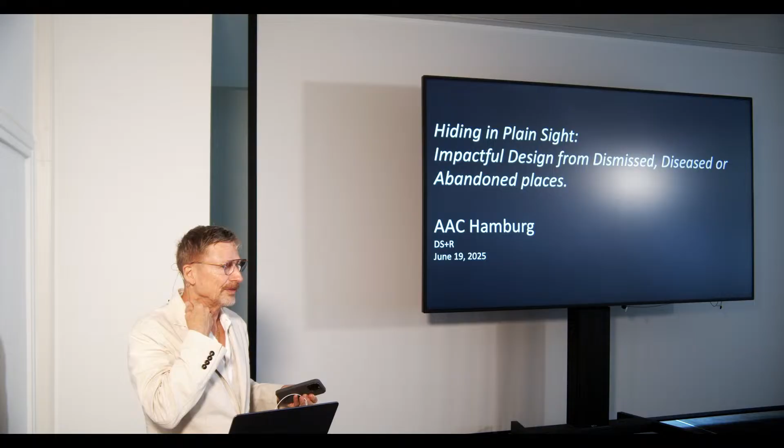Hi there. Can everybody hear? It seems so. I always like to start my talks by saying I'm from Texas, I don't need a microphone. But I'll try to speak quietly tonight.

So I'm really thrilled to be here in your beautiful offices with this stunning view of an industrial landscape, which in a way is reminiscent of Houston, a place that is made up of half industry and half something else. It's not quite city, some people have termed it Drosscape, whatever.

But to me, it's all about possibility. And that's why I think the Houston problem, I'm talking to the people in the program here, I think the Houston problem is really quite wonderful because it's about possibility.

Houston is never made, it's never done, it's always in the process of being done. And that's why I think if we take the problem seriously, and I'll talk about this more tomorrow in our crit, I think we can make something really relevant in this absolutely unique site, grown out of its possibilities.

So we'll talk about that more tomorrow. But mostly I'm really happy to be here. It's true, I came knocking on GMP's door. I said, can we work together on something?

Anyway, and then it turned out that it's AAC, which I teach and I practice. I do all of it, little bits of it all. I'm going to try to talk for an hour.

Today's talk is really intended to showcase a portion, a section of our work that is maybe not the most famous, but some of our famous pieces. But mostly it's to showcase a practice that we do, which is kind of cultural archaeology.

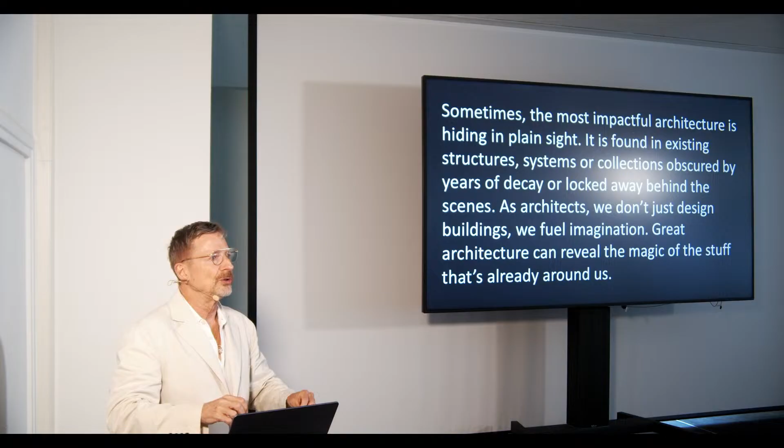Sometimes the most impactful architecture is hiding in plain sight. So one of our practices in DS+R is to drill down on a site. And a site is not just the physical location, it's the historical, cultural, technical kind of milieu that surrounds a project. It's not just a place. And always by drilling down, you can always unearth the most exciting things. That's what this talk is about.

And so some of these projects are adaptive reuse, some of which is very relevant to what we're doing here at AAC. Some of it is just sheer fun, and you'll know that in just one minute.

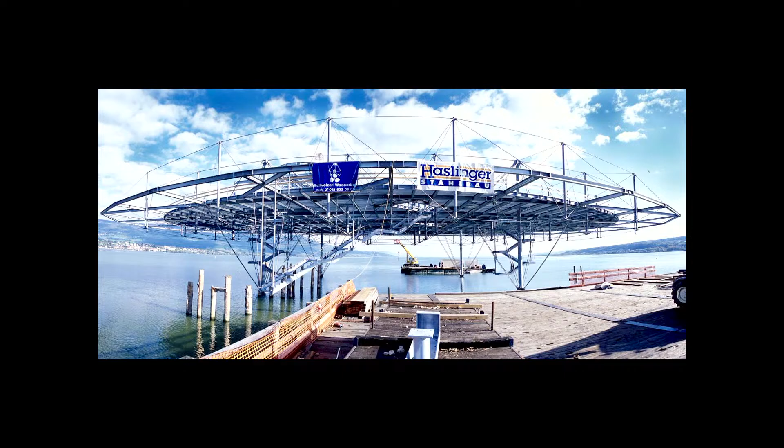This is a project made entirely of its site. Yes, it's got fog nozzles, but what makes this piece of architecture - changeable, movable, tasteless, weightless, constantly evolving - is made of the lake itself, Lake Neuchâtel, presented back as an immersive environment. We did this through a clever reimagining of 33,000 lettuce misters, something you could buy in a Grainger catalog, hanging on an innovative tensegrity structure. It's really an off-the-shelf product used in a ridiculous proportion, and it made a cloud the size of a football field that one could walk through and inhabit.

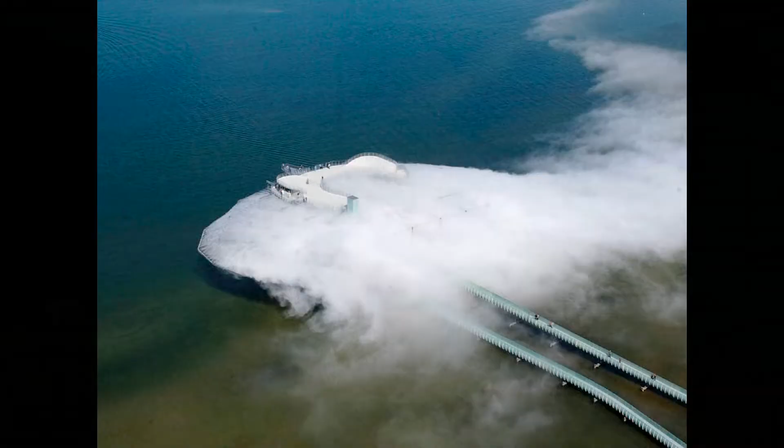This was a temporary pavilion for the Swiss Expo 2002. When we were tasked with the job, they said make a media pavilion, because we hadn't built a lot - this was in the early 2000s. Liz, Ric and I had made our practice about interrogating culture through the use of media. They thought we'd make some giant 100-meter high video screen, but rather than do something digital trying to recreate verisimilitude, we did something completely mechanical - something that would defy what people thought about our practice, but that illustrated a principle that guides us to this day: you need to look at the site you have and find incredible things about it.

It turns out that to pump lake water into misters, you have to clean it really thoroughly. There's phytoplankton that live in the water, and if you don't clean it with a sand filter, you can actually get sick and die. We didn't want one of our first pieces of architecture to cause any deaths.

What we liked about this project - and it's something we try to do in all our projects - is to understand the cultural framing of an experience. Here, we wanted to do something fun to look at, but that would also rob you of your sense of vision. Visuality and sight are things we interrogate in our work a lot. By taking away the understood idea of vision - something that might have been held in the pixels but that we stripped entirely - you fall back on your other senses, and you realize how dependent we are on vision, as the master says.

Jump forward ten years, and with the High Line we had the opportunity to remake an abandoned rail line that was 3 kilometers long. It had only been used for about 40 years to transport food, essentially, to all the neighborhoods of lower Manhattan. It was abandoned after the interstate highway system came on, and the city of New York didn't know what to do with it, so they just let it lie fallow and become a kind of industrial ruin.

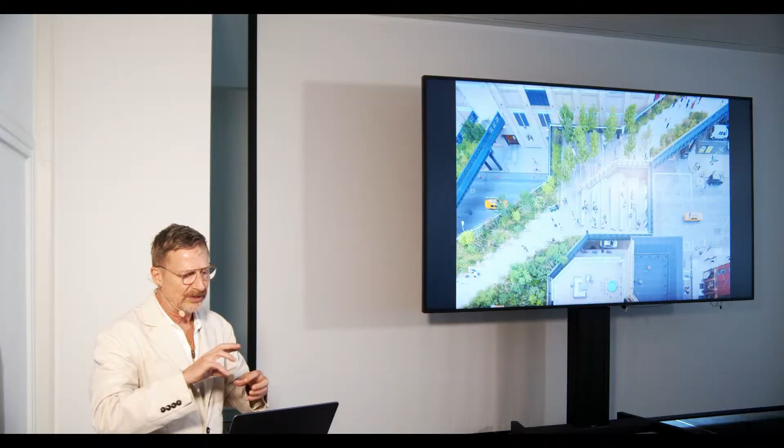It's an observation platform where people are observing each other, interacting with each other, a place where people get to see and experience New York in ways they've never experienced. The existing line touched buildings, went adjacent to their loading docks, passed through buildings. It's kind of a pornographic situation, an urban pornography.

We wanted to just keep that going, so we took advantage of moments where the structure was overwrought, oversized—like here at 10th Avenue at the crossing, the beams were so deep we could get an entire floor down to the very bottom of the beam. So we made this observation deck that lets people sit there and look at the tail lights of people going up 10th Avenue.

Such a quotidian display—I don't think anybody's ever really highlighted that before. But what it does is it makes you think about the world around you, the city around you, the New York City that you don't ever see. You're in it, but you never really see it. And we encourage people to take advantage of each situation.

Lots of weddings, lots of impromptu musical elements have happened there. This is when the High Line opened. The first Standard Hotel opened, and it crossed the High Line, straddling over the line with its legs. You can only imagine Andre Balazs, a bit of a bad boy hotelier, encouraged—so it's been said—his employees and guests to put on a bit of a show for people on the High Line. Of course, we love that. We love it when something inspires people to act, and we got so excited about this. Again, this is about mining what's there.

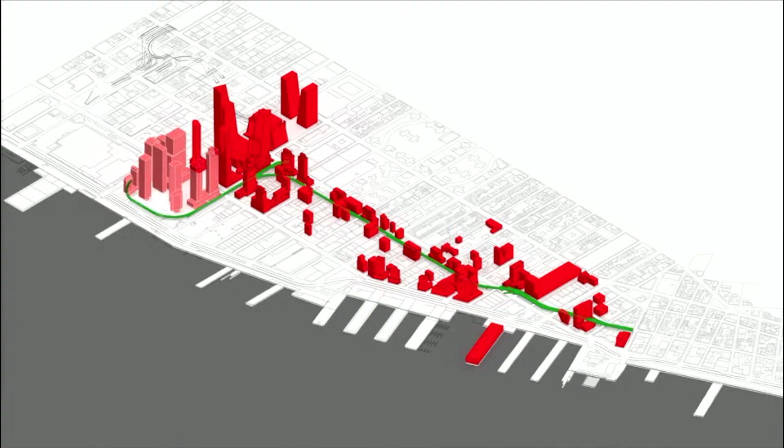These are all the projects that have been made since the High Line was made, and most of them were made directly on the line, because we rewrote the zoning when we made the line. We rewrote the zoning to allow medium-high buildings to be made right on the line. They could touch the line if they put an elevator and a bathroom in, and the owners could transfer air rights from their medium-high buildings to the edges of the blocks to make high-rise buildings. So there was a kind of handshake deal to keep development dense but low along the line, to mimic what was there to begin with, and then to boost development in the rest of Chelsea.

It's been interesting, and the cover of New York Magazine says it all: how a park built on a junk heap became a glamorous symbol of everything you love and hate about the new New York. I think that's pretty interesting. This does go to gentrification, which is one of the things we have to look out for when we do projects that are remaking our cities as we know them. Somebody's going to get left behind, somebody's going to win—you can't solve all the problems all at once.

But this seems unrelated, though it's related. With the Broad Museum, what we tapped into—the hidden thing we tapped into—was the youth of Los Angeles. We did that in two ways. One, we made the museum ticket-free in conjunction with the Broad Foundation. And we also made it barrier-free, not in a physical way, but just the way that you enter.

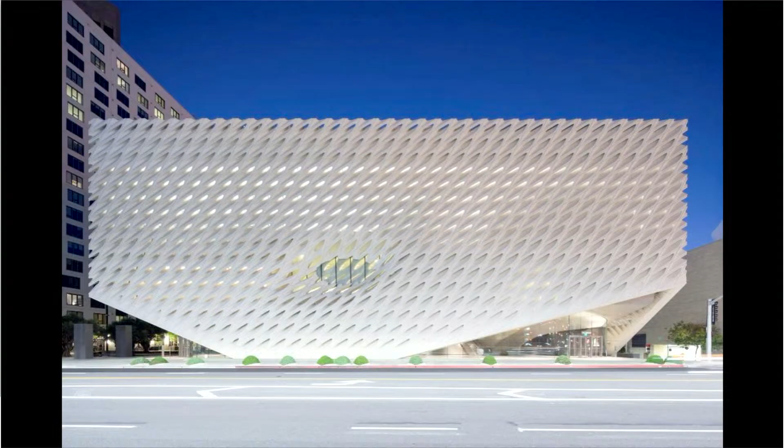Here's the veil. You can see how all of the pores of the veil, also sort of like a sponge, are angled in the exact same direction against direct Southern California sun, so it lets in only indirect sun and shields the interior from the direct sun. This is before we had quite finished moving in, but this is the idea.

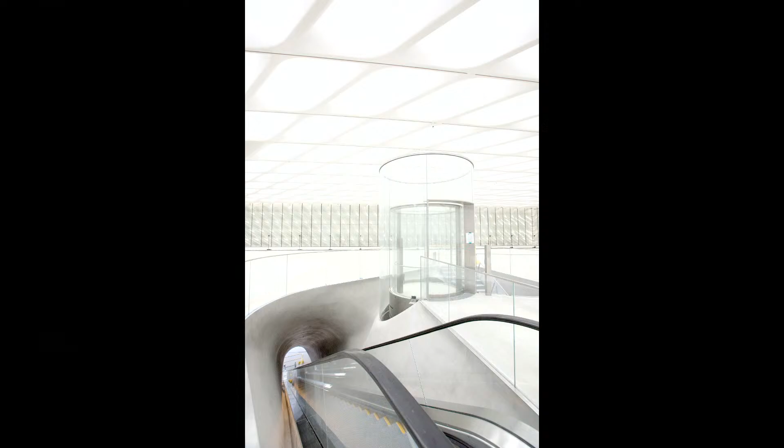No desks, no people - there's a front door, one person to check that you've checked in, and up you go, up an escalator, swallowed up. A one-way escalator takes you up to art heaven, I like to call it - a sun-drenched, indirectly sun-drenched acre of floor space used for the contemporary art of Eli Broad's collection. Here it is without any walls.

The whole thing beautifully bathed in light. This is the first show, which I think is 10 years old now, and you can see how you can just put the walls in. His collection is considered one of the world's best contemporary collections.

Then what happens is when you finish the tour of the museum floor, the gallery floor, you're treated to a different route out. That route lets you explore the archive - it lets you go behind the scenes to see what normally you're never given access to. Here, looking at the racks of painting storage, that's the stair going down. You can also see in the elevator going down the back of house.

Probably 5 to 20% of a museum's collection is ever on display at once. That means 95 to 80% is in storage. We'll talk about that in a second.

So what happened here? I'm just going to read a couple of these points. 62% identify themselves as other than Caucasian, and a big percentage say this is the first time they visited an art museum, which is pretty amazing - compared to the national average of 23% non-Caucasian. Also, 33 years old on average, more than 12 years younger than a national art museum average.

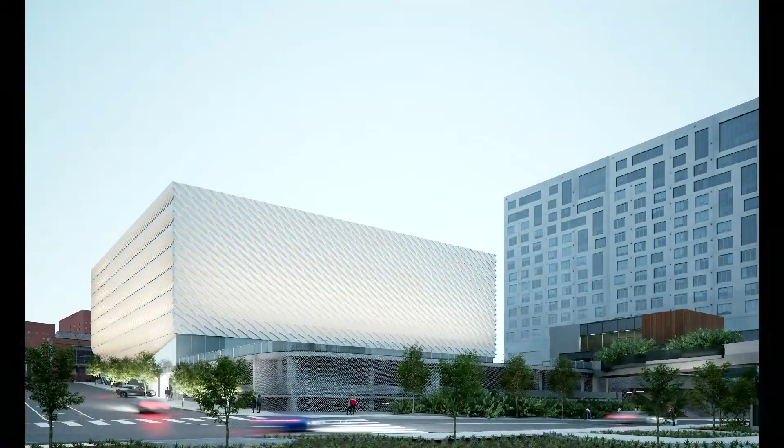There's also a park next door with 125-year-old trees. It's been so successful that, guess what, we're adding on to it. We are happy that we got this commission because, believe me, the board thought maybe it should go to another architect, maybe GMP, I don't know, but we got the commission. It's hard to add onto your own building - you can tell that we were inspired by a fellow German a little bit.

Marcel Breuer came into the picture, who is one of my favorite architects, by the way. And so this solid version wanted to be opposite to the light emitting, but it actually does something really new and interesting and really cool.

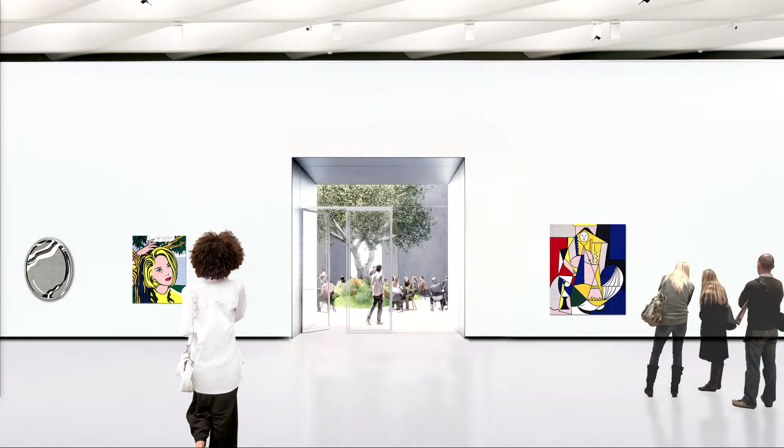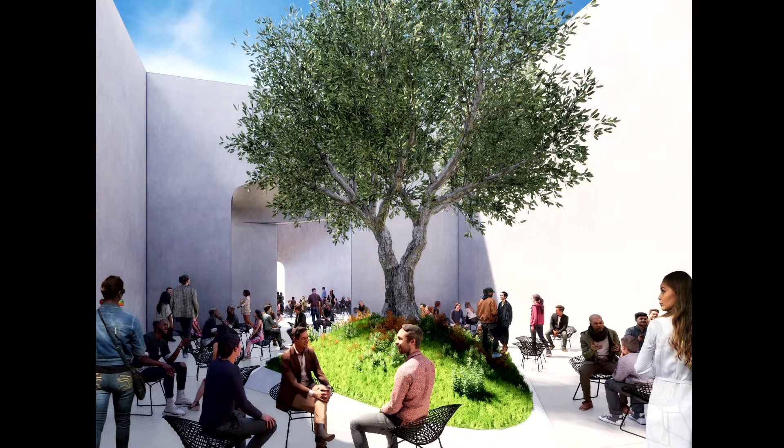So up on the top floor, the third floor of the Broad, which is all light, top lit, when you get into the new area, you're actually going outdoors. And so it's a sequence of outdoor courtyards that link a series of small galleries dedicated to different artists. So it's a completely different experience that unexpectedly brings the indoors out and the outdoors in.

Something you would never think if you know the existing Broad. And here are the Breuer-like windows that frame beautiful views.

And we're always anticipating a future with media that's different than what we have now. What will happen in the future? We don't know. In the world of culture, you can't predict.

We expanded the... something happened here. Fascinating. Oh, it does show there. Fascinating. Okay, anyway, we've expanded the...

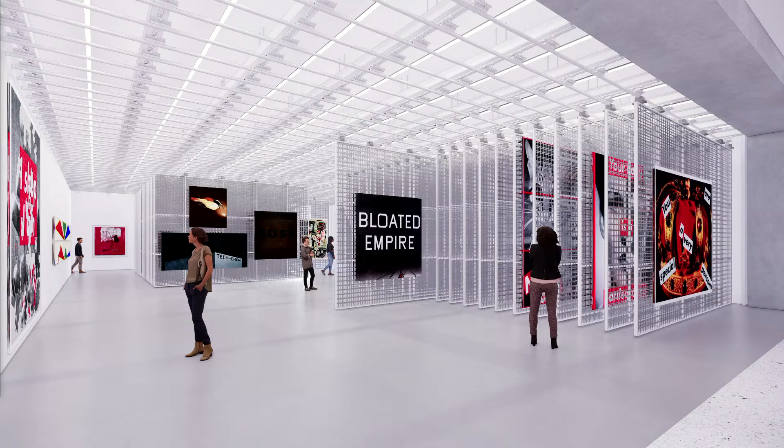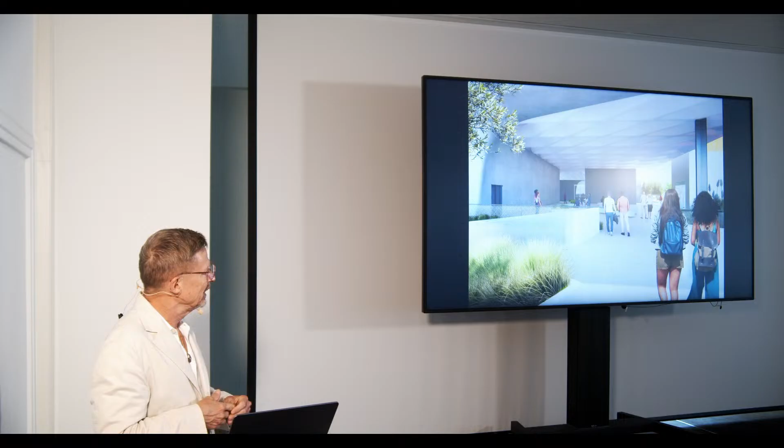Storage area that now actually will be a little bit more publicly available to wander through. And the point here is that this tiny museum has a whole huge collection of moods and experiences, and rental possibilities. There's a space down below that will become a kind of event space. So you're always having to think about the layers of use, the different populations, all of this stuff.

And then just two weeks ago, this is related, directly on the conceptual heels of the Broad, the Victoria and Albert East Storehouse opened. Victoria and Albert is one of the museums with one of the largest collections in the world, and the collections are wild.

Spaces, environments, pieces of architecture, so that we wanted to make the building, the entire building, feel like a cabinet of curiosities, a place that is not necessarily curated, but it's available for you to see. And sometimes the juxtapositions make unknown stories come to life, depending on the viewer.

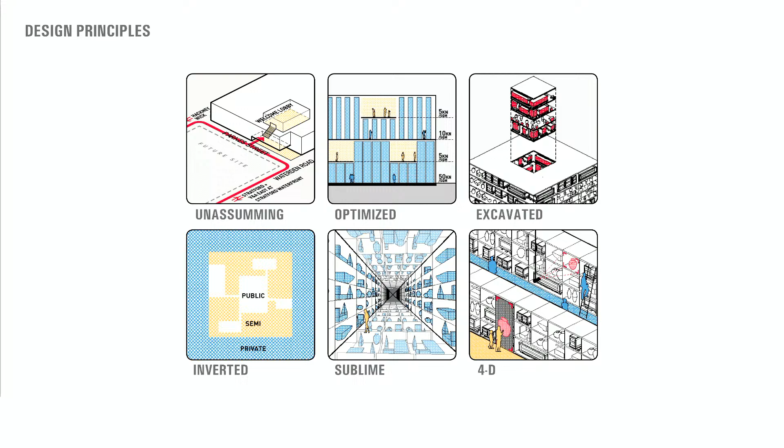We wanted these to be the principles that guided the design. We're building in a warehouse building, completely unassuming, that had been the press center for the Olympics, the London Olympics a few years ago.

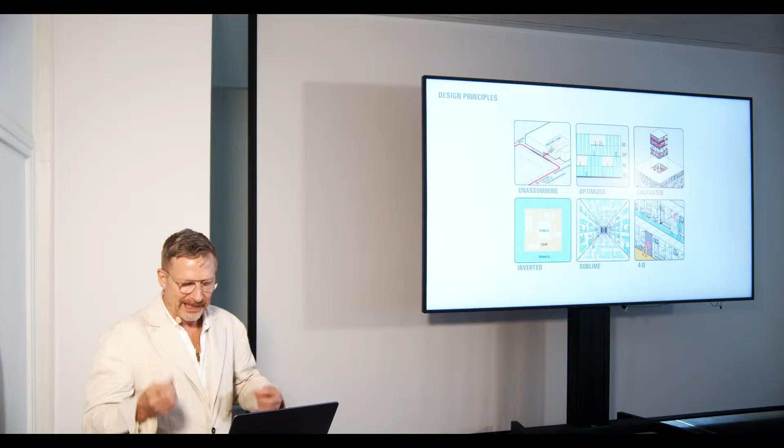And we're filling that place out with storage racks, high density, dumb storage racks, and then excavating the experience from those storage racks. So we're sort of making a field and taking things out of the field to make the experience. This is what it looks like on the outside, completely unassuming.

And then this is the section. You're taken from the ground floor to an elevated platform that's carved out of the storage. And you'll see this in greater detail in a second.

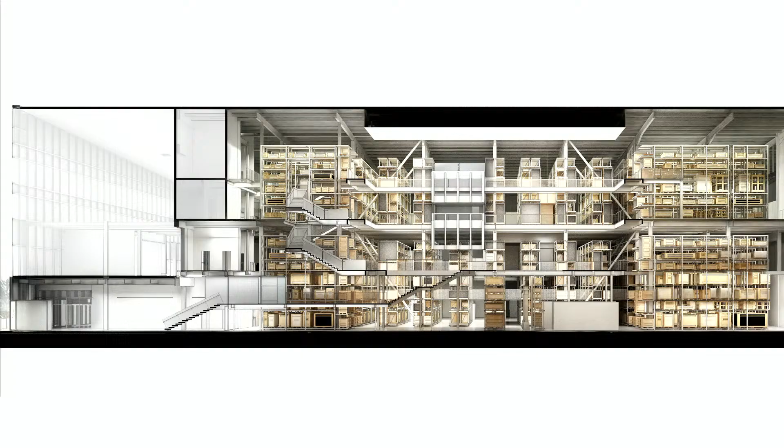And you know, we're always interested in the reveal. Architecture can be like movies. There is cinema, there's time, there's a space. And like the Broad, when you go up the escalator and find yourself in this heavenly lit museum space, or you're in Jordan, at whatchamacallit, I always forget the name of this place.

Petra, thank you. And you walk through cracks in the walls to see a fully formed temple. That's what we were trying to do here.

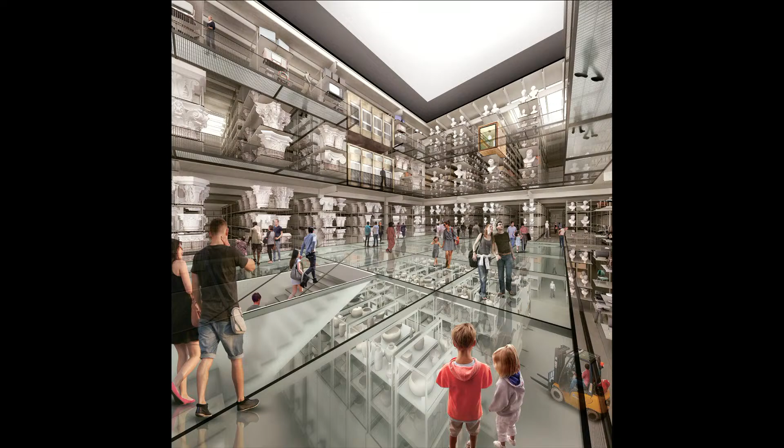So these are actual photos from a couple of weeks ago. This is the stair coming from the ground floor. This is not an actual photo—this is what we intended it to look like. And another one here with a glass floor.

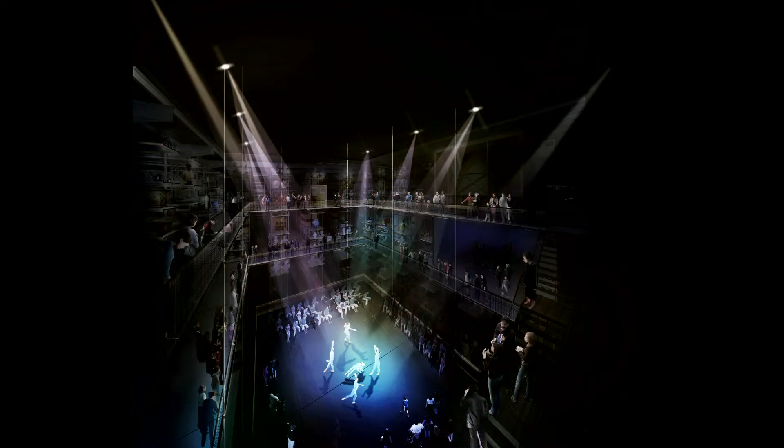And then even thinking about how the place could be used for different things. And then this is it—this is what it looks like, pretty much like our rendering. So an atrium, a kind of agora, where you just get a sense of the scale and depth and diversity of the pieces that are stored here.

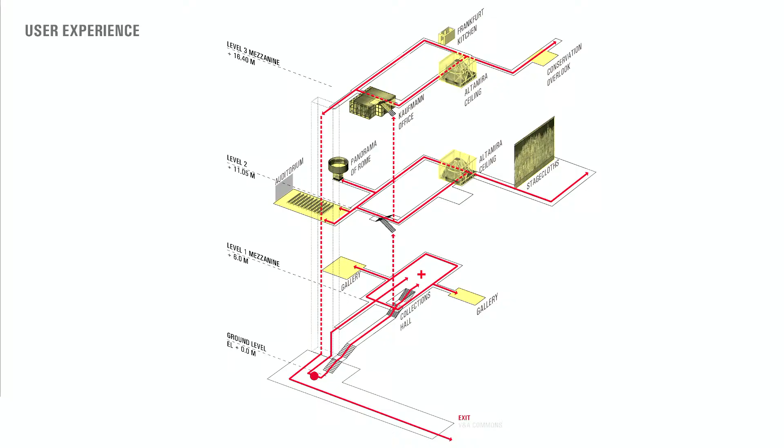That's the Robin Hood section of the Smithsons' Robin Hood Gardens, which was demolished five years ago, but pieces of it are now hanging there permanently. And off of this central space are a series of places that you can go. Again, this is operating somewhere between a research facility, storage facility, and a museum. The public is welcome here, and they can go a lot of places one could never normally go.

We have, in a very precise way, made some of the artifacts available and put them on a kind of tour route. I'll show you a couple of those in a second. In essence, it's like a Nolli plan of storage, showing the density and thickness of storage in different methodologies: compact storage, storage on shelves, storage purpose-held in rooms, and very tall storage.

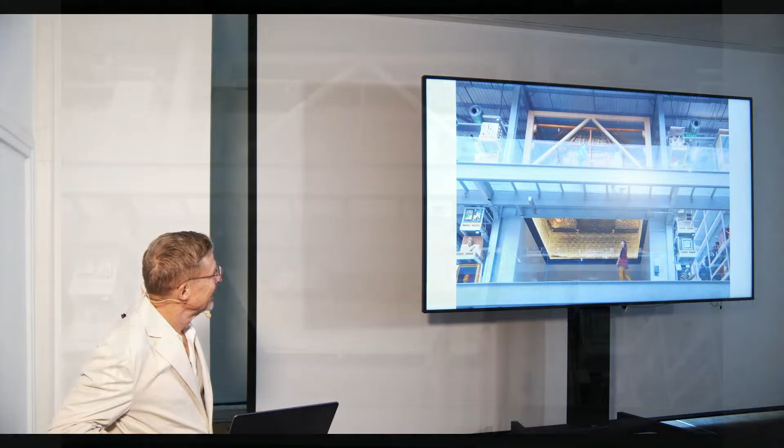What's really fun is that on the outside, you get to see the structure that holds it up, both the structure that we made and the structure that is integral to the piece itself. So it's always a sort of looking at things front and back, understanding both sides of the narrative. There's always two sides. And then there's racks and racks and racks of storage of paintings.

This is the conservation lab. You recognize that kind of idea from the Broad, where you're given visual access with an overlook, and even an interface where you can explore what they're working on through a digital interface right there on the overlook. So you get to construct your own tour, your own depth of knowledge, and stay there as long or as little as you want.

We were able to show things that could never be shown in a museum. This is a Picasso mural, and I apologize, I don't know all of its story, but it's obviously big, and we were able to show it inexpensively.

This is not in downtown, this is in East London, where they had the Olympics, and therefore the space in which this artifact is held is less expensive. You can dedicate time and space to something like this.

This is getting closer to some of the work that we're doing here at AAC. In Boston, we're transforming the Metropolitan Storage Warehouse, which was made in the late 1800s in Boston, into the new School of Architecture for MIT.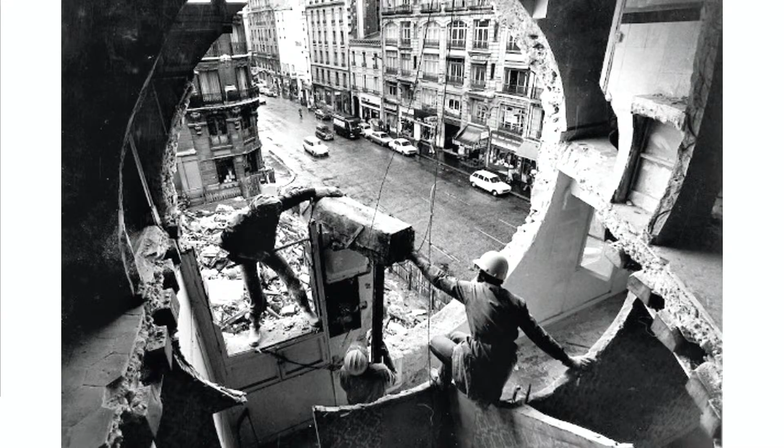Everybody who's been to Cambridge knows this building. It's this beautiful, hulking, really long building, which is actually a set of 5 different buildings. Something we're very interested in doing is the archaeology, or violent archaeology, of Gordon Matta-Clark. This is Gordon Matta-Clark operating on a building in Paris after it was declared that it would be taken down. He's one of New York City's great minimal sculptors.

His sculpture was made through extraction, or severing, made by an act. The V&A building was also sort of subtraction too. We're very interested in this idea of the cut and the reveal.

For MIT, the building had terrible floor-to-floor heights to begin with, very little light, and couldn't be used for an architecture school, so we had to do some major renovations. In every building, we took out a center atrium space. You can see that represented in this glazed plexi block.

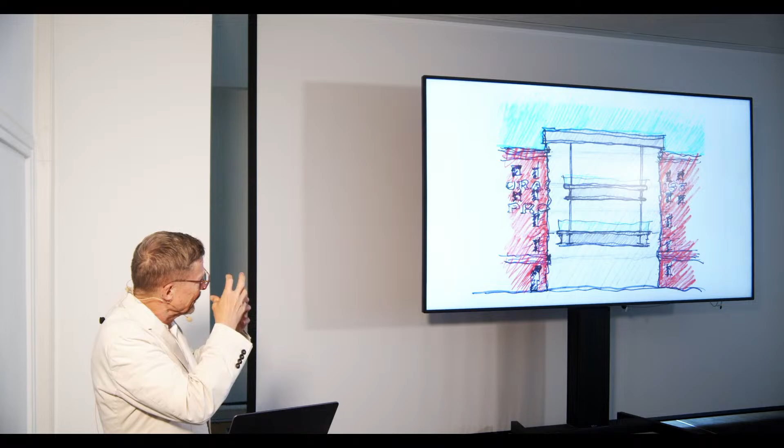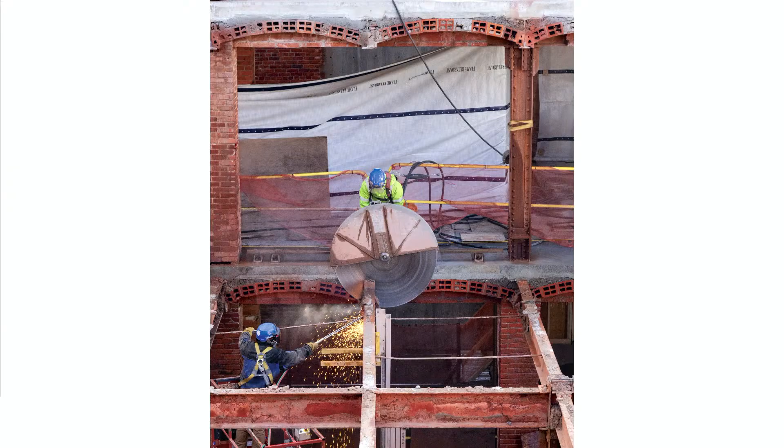Then we hung from the top down, resting on the very heavy-duty bearing walls of the building, the new studio space with ample light and ample distance so you could have a proper architecture school within this building. This is an actual photo of the guys cutting the building up to make way for these suspended spaces. These are the architecture studios, suspended within the density, the flesh of the existing brick building.

And this is the actual building—this is from months ago. The building is almost finished, but this gives you a sense of how the structure needles its way, feathers its way into the existing building. And here's where, without leading the jury, getting into the Humble building in Houston, there are ways that extraction can make the existing better and make the extraction better, to make really new kinds of architecture that crossbreed old and new, spatially and system-wise. That's as much as I'll say about that today.

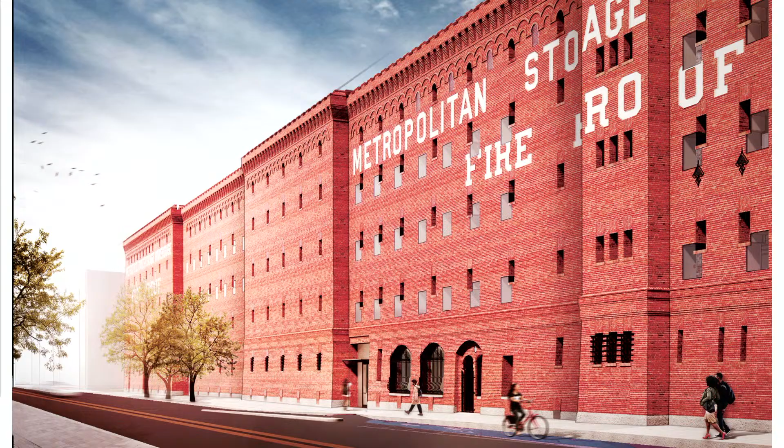And then where we put new floors in, some locations we put new floors, we also put new windows, and the windows just happen to intersect the old windows in very, again, almost pornographic ways. Like that shouldn't happen—it should not be exposed to public. But we think it's pretty cool. This is the way it's starting to look.

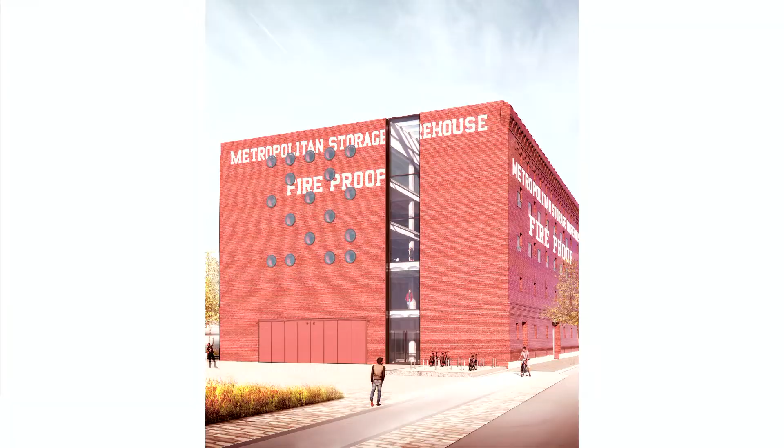And we also wanted to, on the short end of the western end of the building, put new holes through with a circular drill. This is the circular drill going, and then you can see we use the brick as stools, and no one's going to take those stools to their dorm room—I'm just saying, it's a self-defense about being stolen.

And then here's the main lecture space, and just, given a window through cutting the brick wall out. So this is the actual cut of the brick wall. And then here's our little model, and then this is what it's starting to look like.

Unfortunately, the glass is far more mirrored than—the same thing happened to all of you saw in Houston at our building at Rice that's going up. Same problem: they have coatings you have to put on for energy, and unfortunately it doesn't do exactly what you're advertising. This is something we all need to work on together. I really think glass and glass coatings really need to work on this.

Okay, how long have I been talking? 36 minutes. I promised I'm going to finish in an hour, which I think is the case. Therefore, I'm going to take a sip of wine.

Here is not an adaptive reuse, but you can see it's an adaptive—I'm just going to try to make up a new term. It's basically being taken from a Class C office building to a Class A office building, which is not something we're talking about for the Humble building, but it is something that is happening. One of the ways that places are combating their obsolete office buildings is by upgrading them into not obsolete office buildings. It's not a race to the bottom; it's a race to the top in a way. And I think it's bringing about quite a bit of innovation.

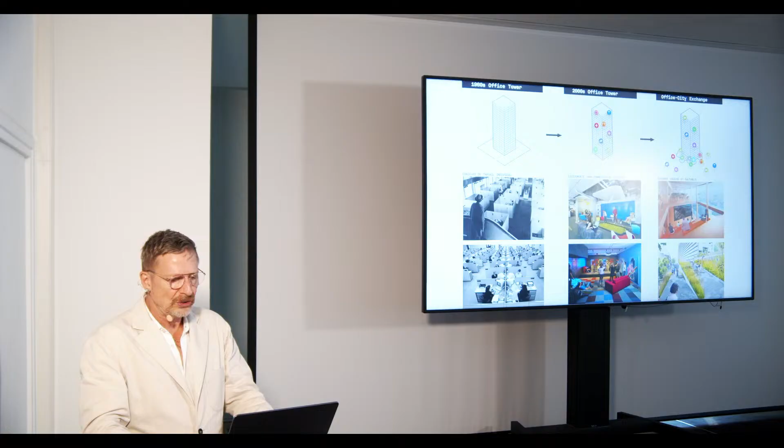And so the developers of the building, Altarea, purchased it and became our client. Their hope is to bring a new life to this building, to update it in a whole bunch of different ways, and to attract ultimately larger scale tenancy from a tech company or a financial company that will bring a new kind of life to this part of Paris.

So this little diagram here really says a lot. Playtime, this most fabulous movie, Jacques Tati's movie about Paris, was literally modeled on this building.

What we're trying to do is, it had been updated a little bit, a 2000s office building. You understand it—it started in Silicon Valley, there's couches, there'd be ping pong and maybe slides or whatnot. But what we decided was that this building would be a microcosm of the city itself, almost taking Anne Hidalgo's idea, a 15-minute city, and bringing it into this place itself, opening itself up to the public.

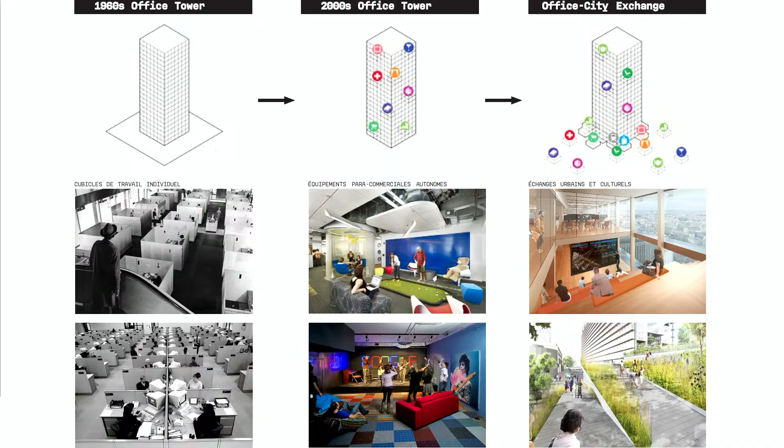And we're getting some of it done. In the end, there was a little bit of creative wishful thinking that is not being executed, but the thoughts that generated the design are very much still in place. The idea was that you pepper the building with different uses, and different populations, so it becomes a whole mixed-use place.

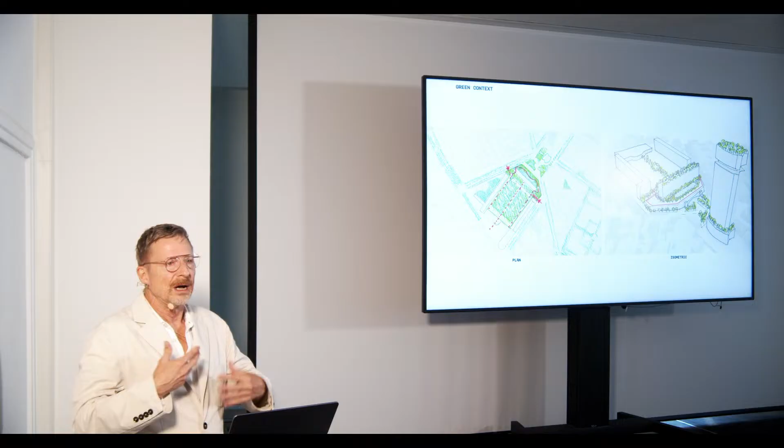The other thing we're doing, also in conjunction with Anne Hidalgo's office, is greening the entire district. The Jardin Atlantique, on the lower part of this page on the left, was already there—it's a garden. But one of the things we wanted to do with our building and the top of Gare Montparnasse is to make them all public and bring a new kind of green, in the vein of the High Line, open to the public.

So here you see some of the components. We basically stripped the entire building down, took everything out except for the slabs, and we're even remaking a lot of the cores, so that most of the embodied carbon is held within the concrete. It's still there, although we've done very sculptural cutouts to make it have a more dynamic sculptural form.

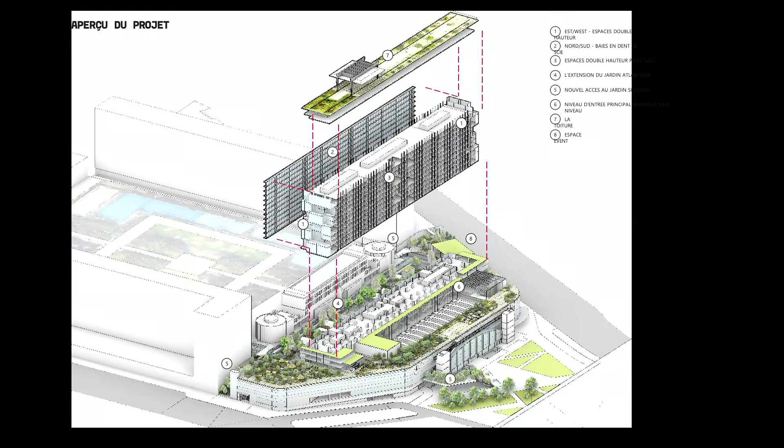We've turned the roof into a farm, essentially for use by the tenants of the building, with a folly that you'll see in just a second that rides down the top of the roof. We turned the roof of the Gare Montparnasse, the lower base of the building, into a public park, available from that number 5 on the left-hand side of the page here.

This is not going to happen, but this was our idea: to bring that park down to the Place Raoul Dautry, the place right in front of Gare Montparnasse. The idea was to pull everything together, to pull the ground up to the top, to pull the top up to the tip top, and to make the public have access to parts in between.

So this is what the renovated building would look like. It had no green whatsoever before on the building, either the base or the top.

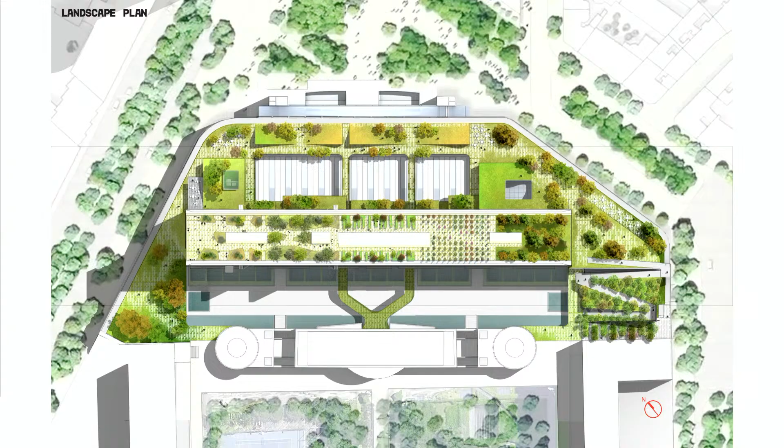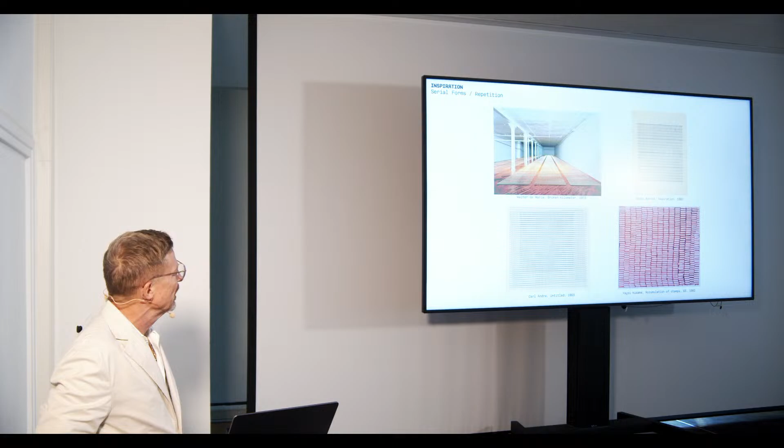And we also were making a new facade, and we became very interested in minimalism, knowing that some of the high modernist buildings—probably Mies van der Rohe was the one who actually realized this best, but also, fellow American, Gordon Bunshaft, American, also did some fantastic work here. The idea was to think about serialism as the inspiration for the remake of the facade, where tiny variations...

It's a kind of quixotic, hypnotic image of the entire building with tiny variations, and the tiny variations themselves would create a kind of new identity. This is what the old building looked like, and so in our new rendition...

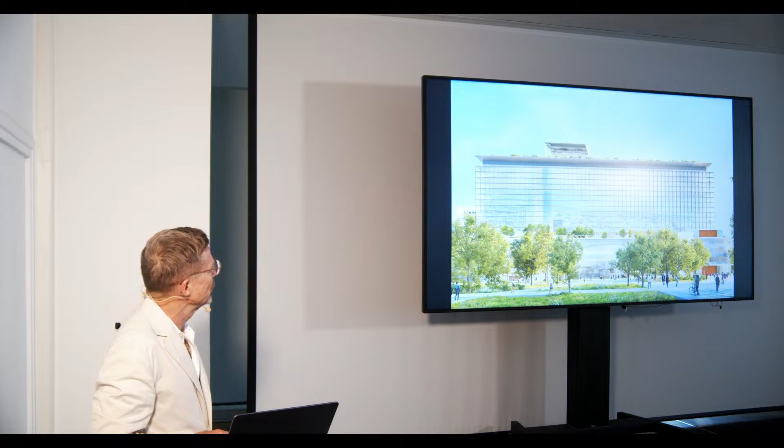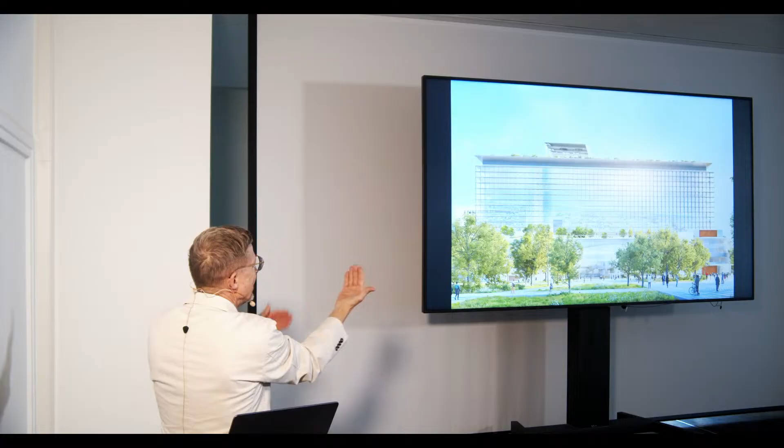So this is doing a whole bunch of little things. All the glass has been taken off, and we're putting giant pieces of glass that are the size of one office each. They're on an angle, very slightly tipped forward, so that when you stand in the Place, as you are here, you're actually seeing all of Paris reflected behind you, and all of Paris is on the other side of you.

And then occasionally—I'm not sure how well this is projecting—but you can kind of see through some of these, and some of them are more mirrored depending on the time of day. The idea is that it would just subtly shift all the time, and become a kind of kaleidoscopic representation of Paris back to itself.

On top is this farm, which is actually still happening, and a folly. And the folly is a digital kind of element, and that digital element does a whole bunch of things.

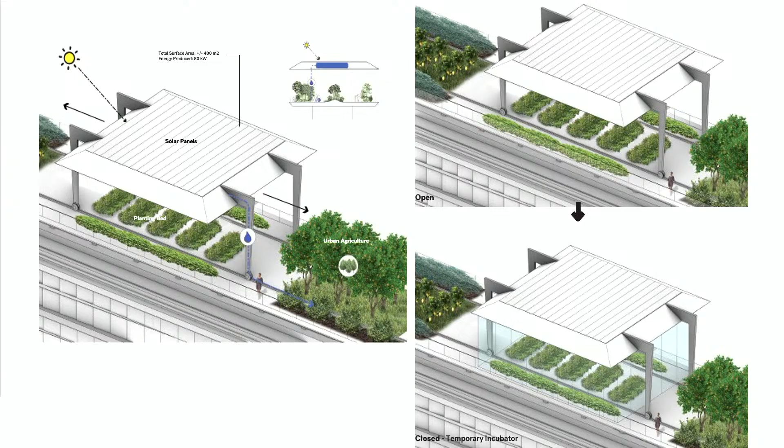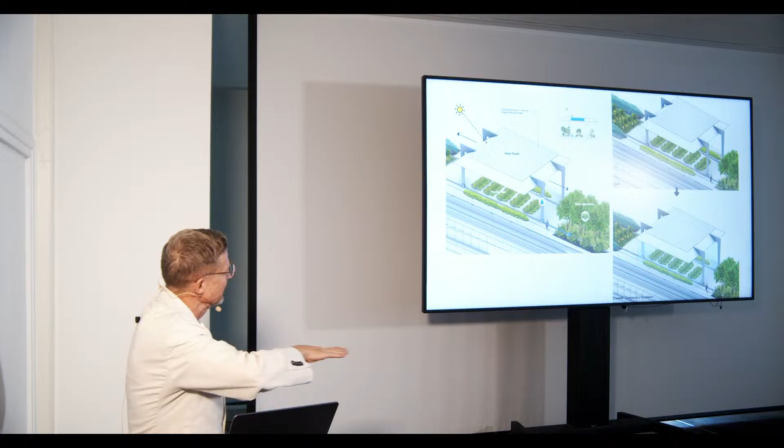It collects solar energy, it collects rain—it's actually a huge storage tank on wheels—and that rain is then released on the plants below, watering them successively. It can be used to shade plants that don't want harsh sunlight when they're just germinating, or when they're making fruit or flowers.

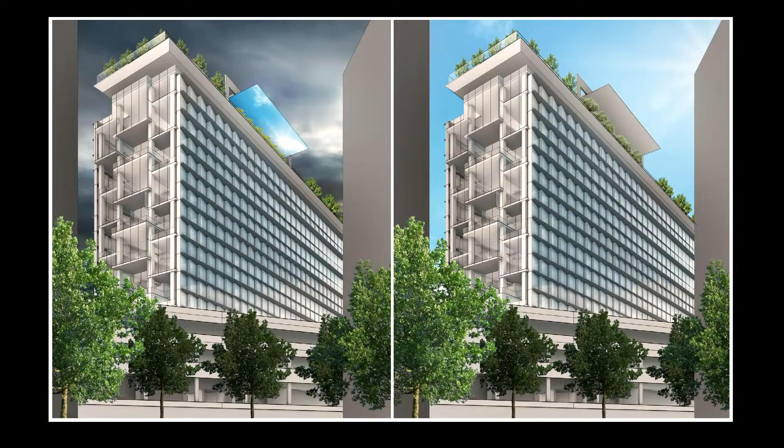And also the underside of this is a big video screen that would be visible from a lot of different places, doing things like on a cloudy day it would bring sunshine, or on a sunny day it would bring clouds and rain, literally raining on the plants below.

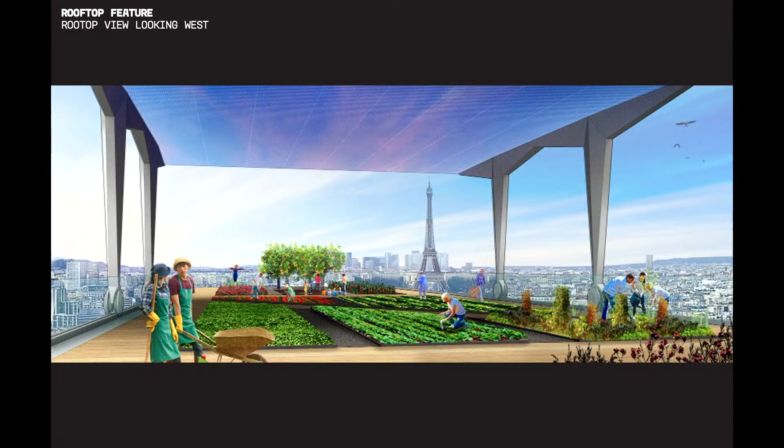You can also see what we've tried to do on the ends, what we call the pignon, where we've scooped out every other floor plate to make a series of indoor-outdoor spaces where the building is completely aerated on the end. This is what it looks like underneath the rolling element there. The lovely farm workers imported from Provence for the picture, having a really nice time there. And then at night...

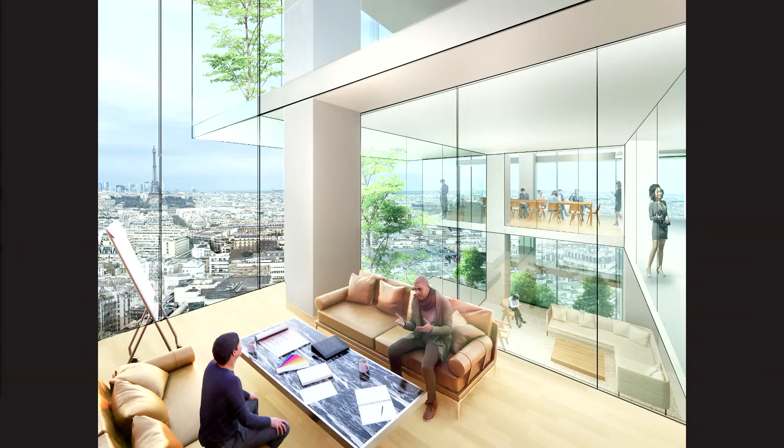You can see how short the floor plates are, and the floor to floors as well. So we had to rip out the drop ceiling where we could, and then kind of selectively scoop out some slabs to make double height spaces, and at the ends scoop out slabs outside and inside to make a series of cascading double height spaces, all with good views, because it is Paris after all.

And this is actually what we're building right now, and it's about to start construction. As of this date, we do not have the rolling mechanism on the top, but we have most everything else. But okay, let's see.

Only 10 more minutes. Okay, I think I have 2 more projects.

Now, the New National Museum of Transport. This is an adaptive reuse, and it is an important one in a number of ways. There's a lot of detail here, but I'm just going to go through it.

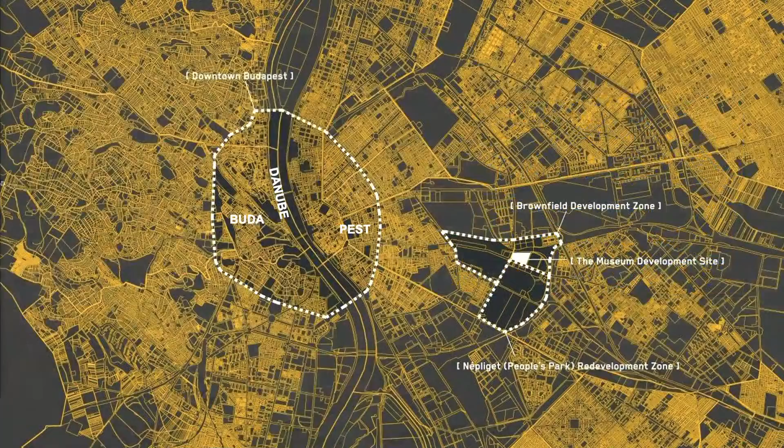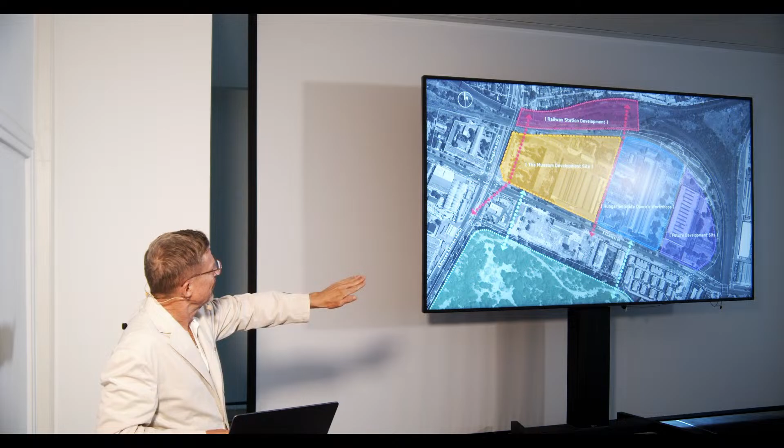This is the old train maintenance yard of Hungary, of Budapest, a brick and concrete building built immediately after World War II. The first version of it was destroyed in World War II. You can see just to the right in that blue section, Gustave Eiffel had designed that storage facility, or warehouse, or maintenance facility, which was not destroyed, and our site is in the orange.

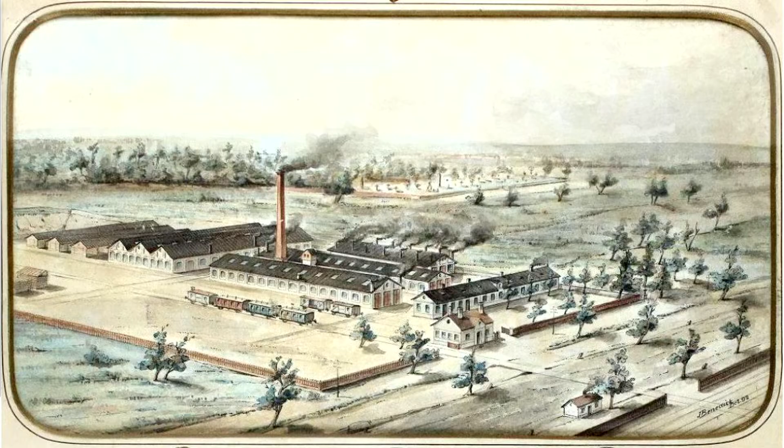There were elements in the building that moved, giant gantry cranes up above, and then this, what we call the slider, which moved locomotives and other train parts across the width of the warehouse, and we still can. That slider still works, and so that will become part of our exhibition.

And when you get up close, you realize it was all handmade. It looks like, you probably know this, Igor, from being in Serbia, it looks really pristine, kind of factory made, but it's all handmade. So it has this really wonderful feeling.

And then Hungary itself was a real innovator in terms of transit. It has the second oldest subway system in Europe. And during the Soviet times, it made virtually all of the buses, the articulated buses, for all of the Soviet bloc and Eastern Europe. So it has this very illustrious past, and that's why they had the idea to turn this old facility into the transport museum.

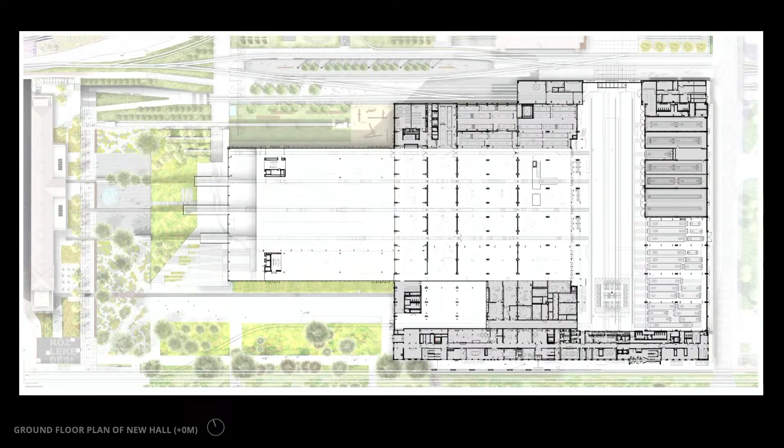This is what the plan looks like, all integrated into a kind of industrial garden that we worked on with Gross.Max. studio. This just gives you a clear sense of the space itself.

It's just really stunning, beautiful space with incredible natural light. And that's what we wanted to do with it, essentially, was to just leave it exposed, expose the concrete, expose the columns, and then put all of the storage, just like we did at the V&A, on the edges.

Put a nice piece of expensive glass so that you can see the storage as a vitrine. And then the exhibit, which can change over time, would be in the central part of the floor.

The new building on the outside of the existing warehouse would be a kind of piano-like, very simple, elegant, softly, naturally lit space that the trains could be housed in.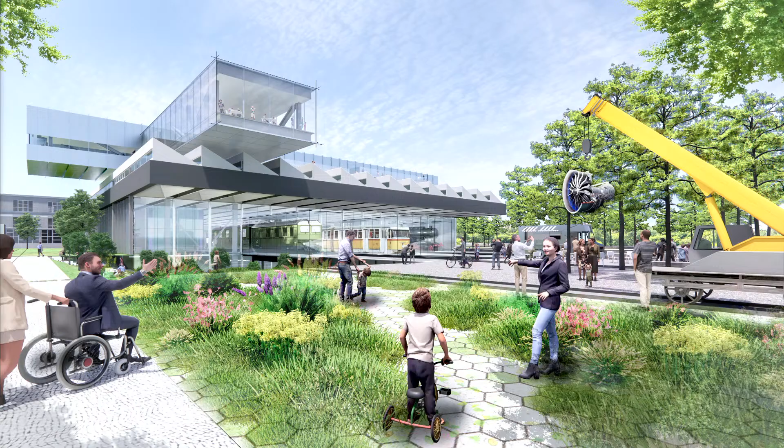And then the trains would actually come through the glass into vitrines on their own, visible to everyone who comes to the site, day or night, 24/7, in vitrines that are part of the park itself. I think that's probably why we won the competition, was putting these train cars out over the park.

And then there's an upstairs gallery and event space and restaurant that will allow the building to have a kind of life that's beyond just exhibits.

We're also really interested in, with this project, being very innovative with our sustainability. So we have photovoltaics everywhere, but particularly covering the parking on the northeast corner of the site. There's PVs and there's ground source heat pump, that's actually geothermal deep well, a kilometer apart, to offset some heating and cooling.

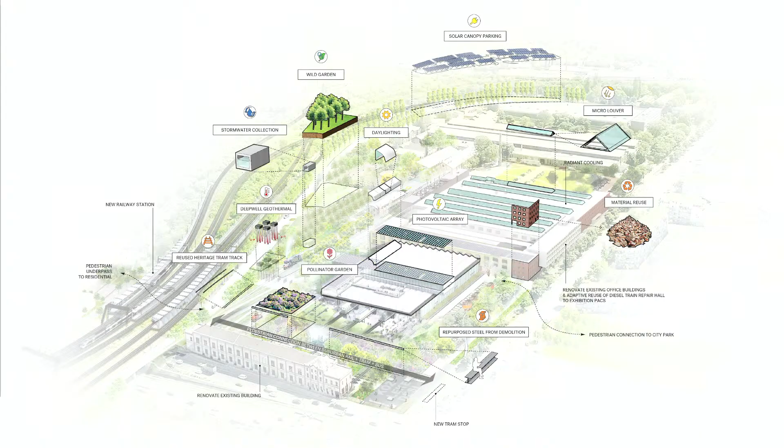And of course, working with the plants and nature to collect water, to purify the water, to reuse the gray water from the museum, etc.

And that's sort of the way it looks from above. That's our sort of money shot of how it will look.

So we're hoping that the museum will be made eventually. It's obviously a fantastic museum, or it will be, and sometimes architecture takes a long time. It has to get through some certain administrations.

Here, this is a really nice way to see the head house. You can see it there with those Y columns, concrete columns. This is actually on the historic register in Hungary, so the building can't be taken down, and the only thing that really makes sense to put there is a transport museum.

So I don't know what Viktor's waiting for. But anyway, it's a very cool project, and of course a crowd pleaser.

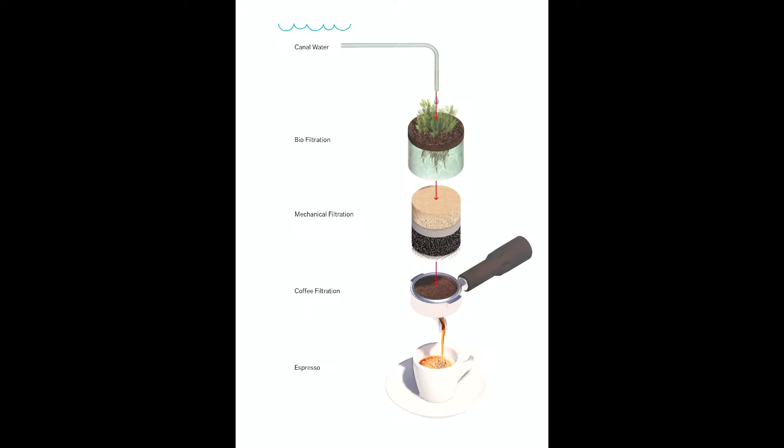And so that's what we did here. The idea was to take the water from the canal, pump it through bioremediation filters, 3 of them, a 3-sequence bioremediation, then through a reverse osmosis filter to take the salt out, or to balance the salt actually, then push it through the coffee to make espresso.

This was our rendering. This is the system. You know, it required some engineering. We worked with great partners. This is not a lone project.

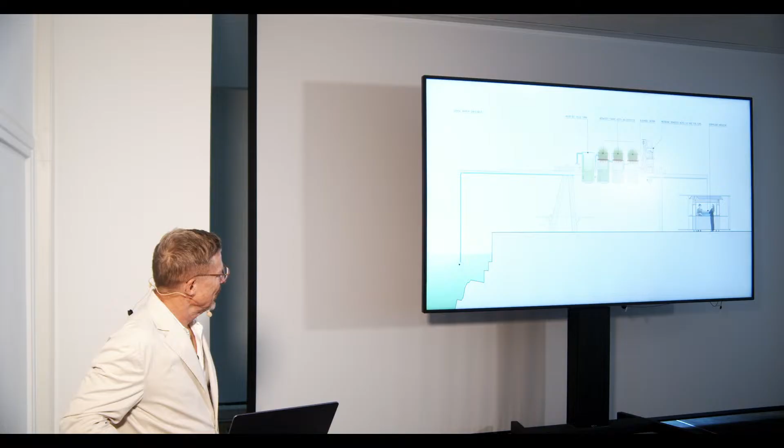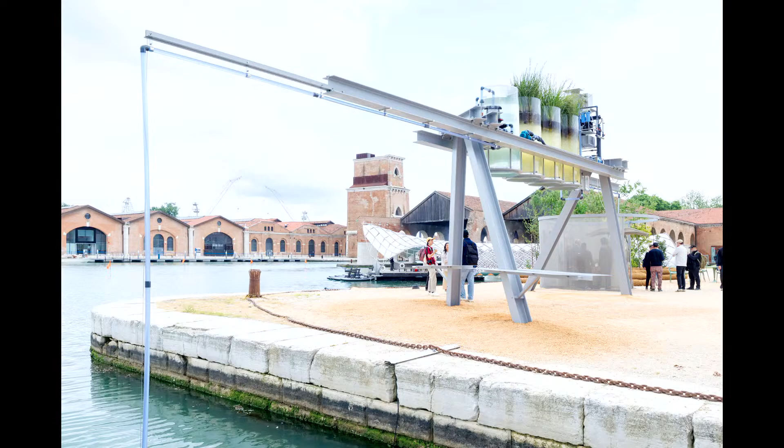Sometimes the easiest looking things are the most complicated things to do. This is a section showing the 4 bioremediation tanks, and then the reverse osmosis, which is the last step, and then the coffee pavilion. This is actually a photo from last month of the thing in action, simply showing itself off, being very clear what it's doing, and then the espresso machine itself, a work of art, sitting there, not giving coffee.

This is for sale, and by the way, this will be up and around until November, so you still have plenty of time to go to Venice and try yourself a cup of canal coffee.

I don't know what that military guy is. What is that? I don't know. Is he going to try to shut us down? Is he an ICE agent or something? I don't know. Anyway, the really cool project, blah, blah, blah.

This is the very last thing, and it's just something that I'm going to put up here, and I might have shown this in Houston a couple of weeks ago to you guys, but this all started with Hudson Yards, and we were working in Hudson Yards in New York, this interest in the remake of these buildings. For a minute, nobody thought Hudson Yards would survive. No one. And it's also tragically ugly.

So I started to think about, well, what makes a city great is its diversity of all the uses together, and it can kind of be ugly, and that's one of the reasons Houston's fascinating. It's like a muffler shop next to a church, next to a kindergarten, next to a tall building, it's got this kind of wild mix of uses that gives it a kind of vitality. And I thought about Jane Jacobs, and the part of the city that she loved the most.

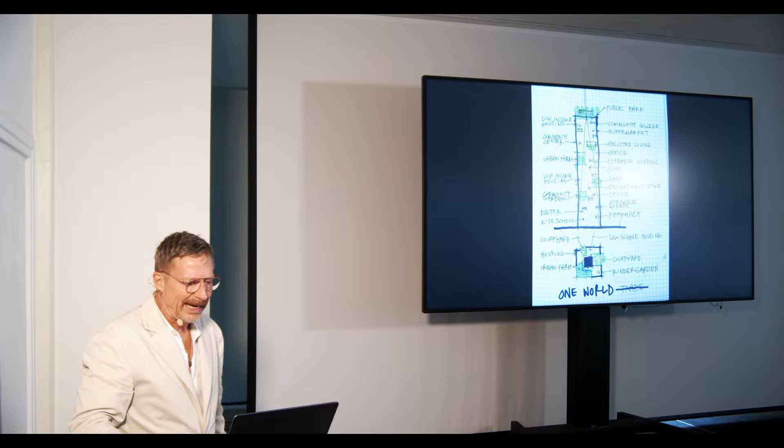Which is in New York City, of course, was Greenwich Village, which had stores and people making things down here, selling things up here, living above, working next door. And I thought, well, why can't we think of remaking these buildings in a much more radical way?

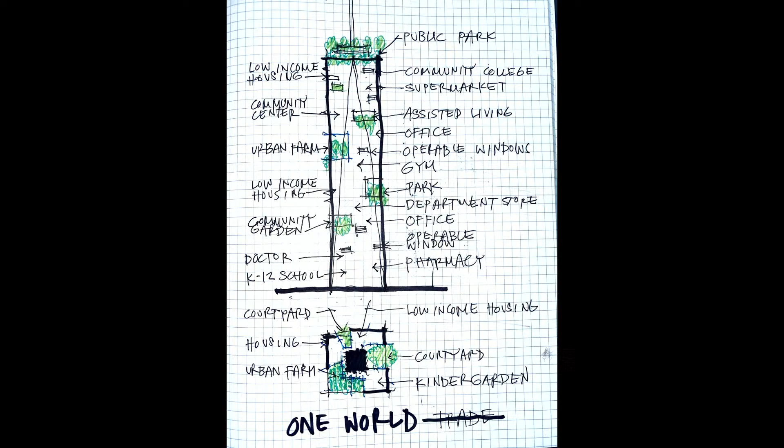And I call this radical mixed use. So I sketched as a guinea pig One World Trade Center, our newest icon that replaced the original World Trade Center. And rather than being a monoculture, if the building could be rethought to be a heterogeneous culture that could potentially even be changed over time.

So a big, deep floor plate would require that you cut out deep into the building. These buildings are interesting because they're supported by the core and by the edges. And so if you take the edges away, you just have to reframe the edges, frame them out, and then you're able to actually take that face away.

And make, let's say, green space deep into this building, and that would allow you to make housing or other things that need light or air deep into a floor plate that is considered too deep to be changed into housing. Moreover, my thought was, why can't this one building have everything that you would need? A 15-minute city in a vertical place.

And you can just read what I have there. I mean, it's just pie in the sky. It's just a provocation. And then I gave a TED talk, a year and a half ago, well after COVID.

And I started thinking about, well, what are we doing wrong in the new build? Could our new build actually anticipate some of the problems that we have had with our existing buildings that are being vacated and they're obsolete?

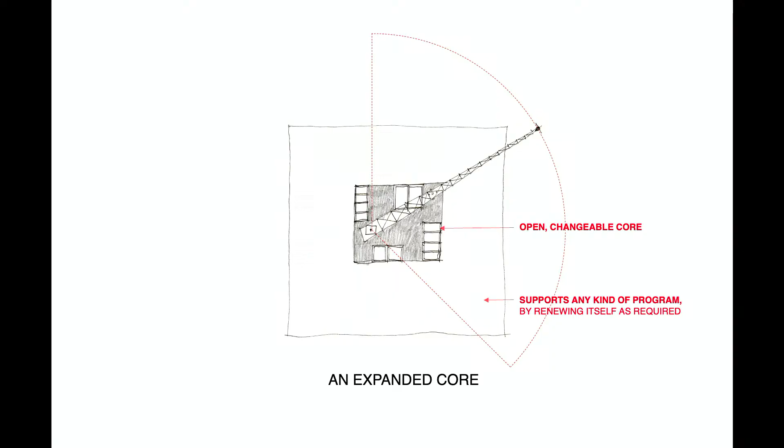If you made a new kind of building with a core that's outdoors, essentially an atrium—let's say it's a courtyard building—and all of the infrastructural elements that a modern building needs, elevators, utility shafts, electric, plumbing, and technology, could be brought into this shaft at different times, never taking one thing out of service before a new thing is in, you're making a skinnier floor plate around the edges, and then changing zoning to allow for a kind of radical mixed use.

This is one floor that might have an elementary school, a park, light manufacturing—stuff that's not making noxious fumes or toxic residue—and housing, all on one floor.

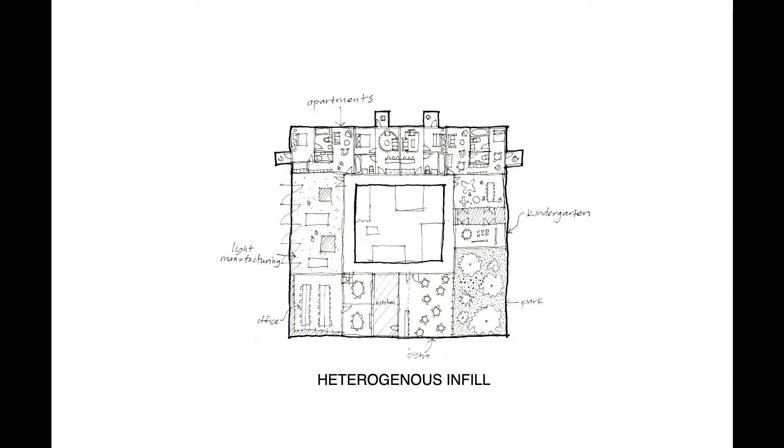Why not? And the idea would be that if your framework has a variety of heights, there's a crane built into it that would allow you to replace prefabricated component parts over time, that would build in sustainable systems, that would anticipate flooding, that would capture the rain, that would do black water treatment, etc. And then you'd get a kind of building that is potentially really ugly, but also really exciting, and that's always changing.

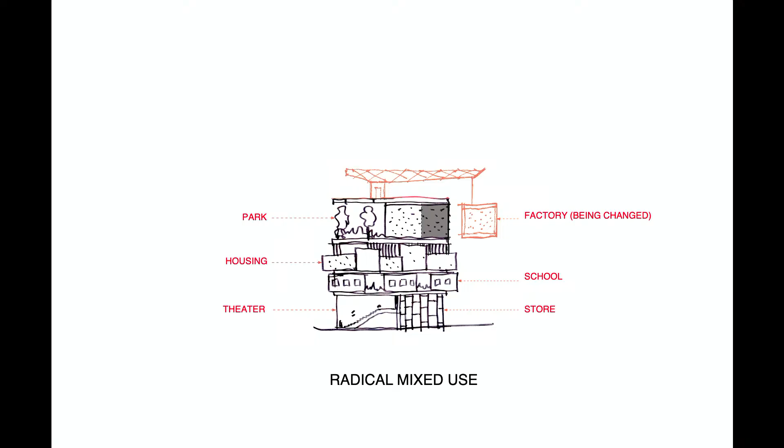So this essentially was my TED talk. It was trying to anticipate flooding. Our buildings—it's here in Hamburg, and we've learned about this today—how tricky it is to build here, and how flooding is really a problem we have to address. So we have to think about that.

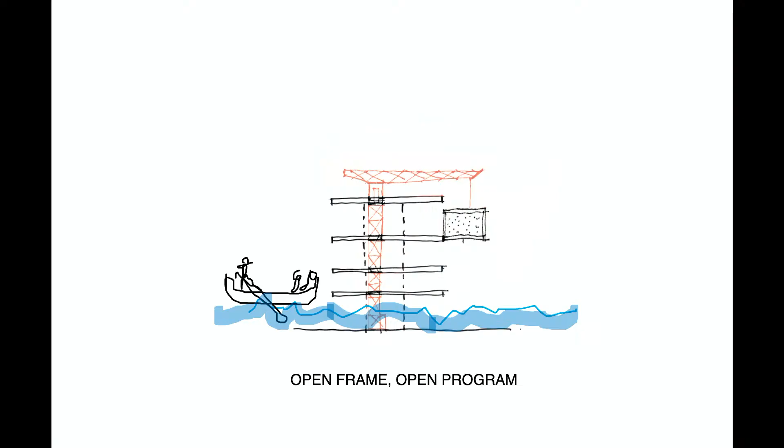Anyway, this is Biscayne Boulevard in Miami. It was TEDx Miami that I gave this talk. And I think that's probably my last slide. The end is just the beginning—just want to say that. So thank you very much, and I will take questions.